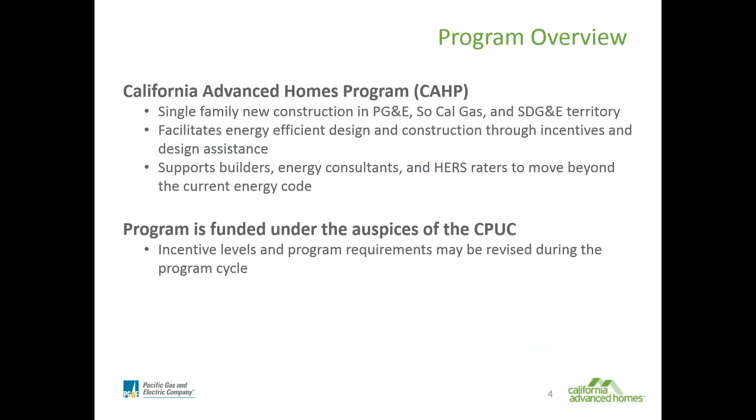We do that through trying to structure financial incentives, through design assistance, and a lot of different avenues. The program is funded under the auspice of the CPUC, and we welcome that.

The program is changing slightly, and that change will be announced in the next few weeks. We're looking at a slightly different program structure that will allow a more equitable entry across the state. More information will be coming on that, so stay tuned.

And the energy consultants listed on the projects must be a CEA under either the 2013 or the 2016 code. At some point, we'll drop the 2013, but we have it for now, just to make it easier.

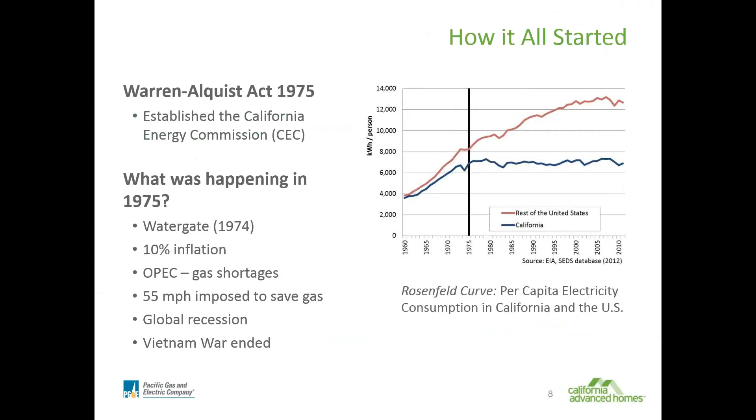So the code is kind of shifting from an energy efficiency code to a grid harmonization code. And there's another webinar on that in a couple of weeks about what that's going to look like, what grid harmonization really looks like in terms of the CEC.

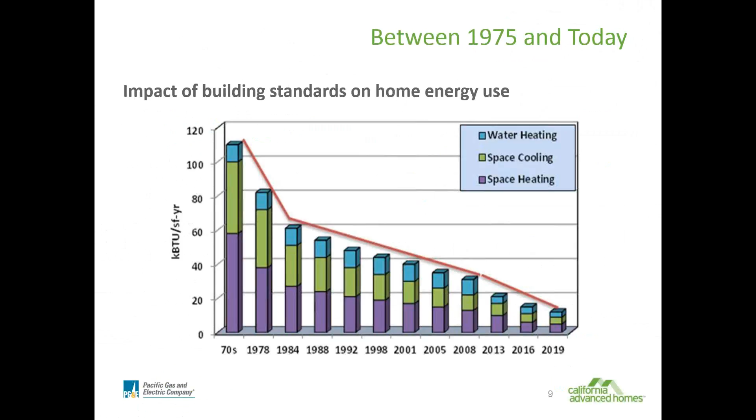TDV is also very important to understanding the code and how to make buildings more energy efficient. I'm not going to go into it deeply, but TDV, time-dependent valuation, is just giving a value for the amount of energy you used based on the time of day it's used. I'll show you a little graph about that.

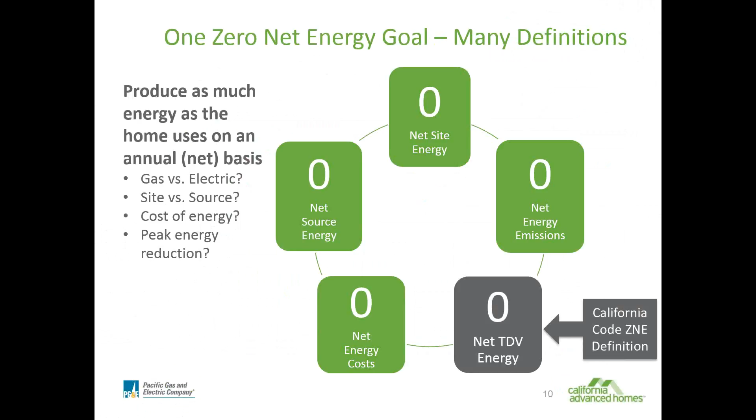This is an older slide. What used to be called TDVs is zero net TDV energy, time-dependent valuation. In the last two months, it seems the CEC has changed the definition of ZNE to be zero net electric consumption, site consumption. We'll talk about that in a couple of weeks. So the definition of ZNE is shifting, maybe dramatically, but it is changing. In the 2016 code, zero net TDV energy was the definition at the time.

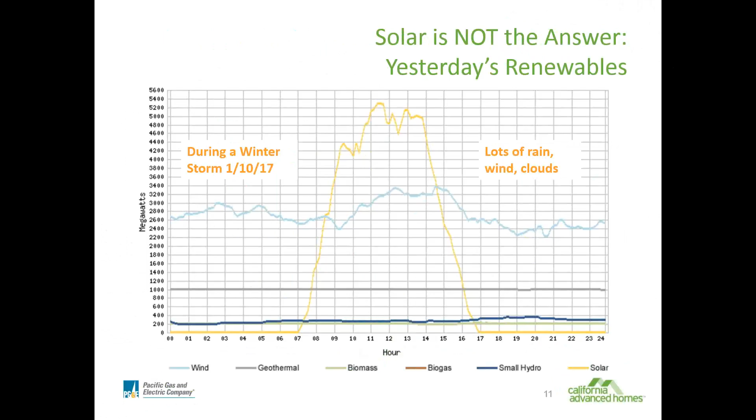This was a screenshot from something you can look at live every day, but this was taken a couple months ago during that last really severe winter storm, showing the levels. This was the next day, and as the storm was blowing by, you can see the wind being generated slowly decreasing.

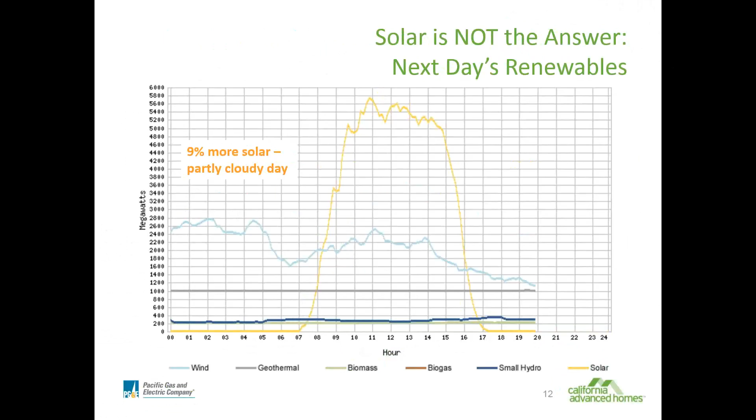Every day this graph looks a little different, but it's generally the same shape. Your peak is going to be higher in the summer, and even more dramatic.

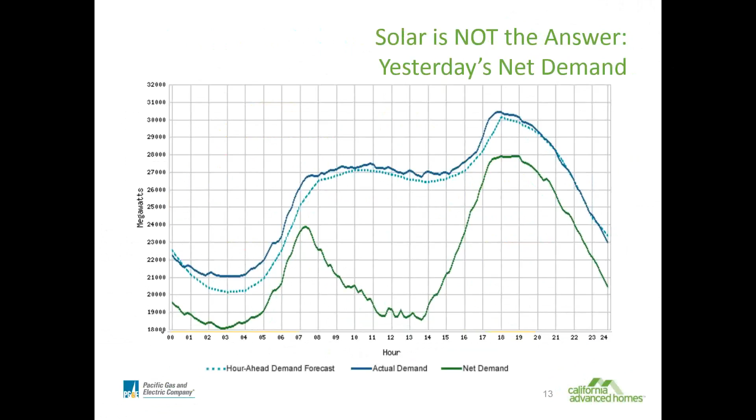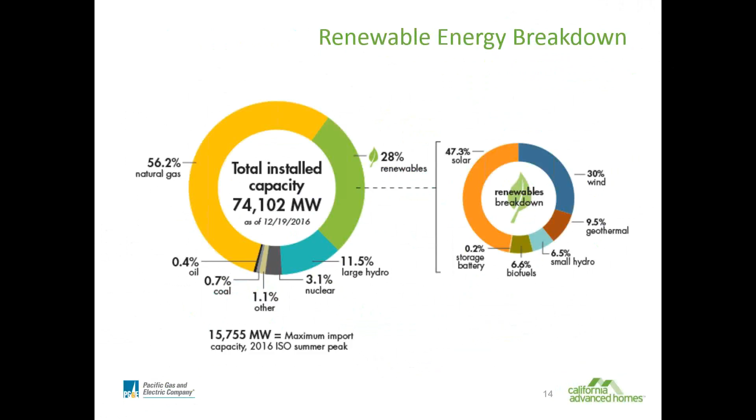Also understanding how to make buildings more energy efficient, it's super important to understand the climate zone you're working in. I've seen many times where people forget what climate zone they're in, or just don't understand the differences. As an energy consultant, that's our job, right? To really help people understand the differences from climate zone to climate zone.

I've seen it many times where somebody in climate zone 7, which is coastal San Diego, the contractor thought it was a great idea to put a cool roof on because cool roofs save energy, right? Well, cool roofs save cooling energy, and if you're in a climate zone that has heating energy and no cooling energy, putting a cool roof on actually increases the energy used in the building.

I've seen that a lot. I've seen climate zone 3 where people put in low solar heat gain coefficient windows because they couldn't wait on the energy consultant, and they just put in better windows. And what is a better window? Well, that all depends on the climate zone you're in. Climate zone 3 along the coast, you just got to be aware that solar heat gain through your windows can help reduce energy consumption.

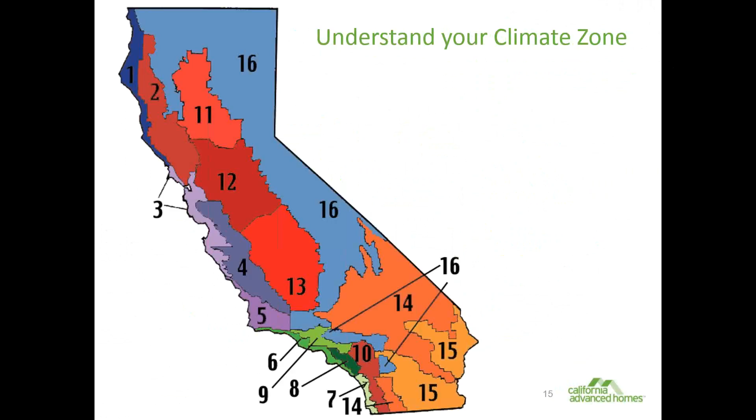It's not just plug loads, let's call it non-regulated loads, which can be lighting as well. So that non-regulated loads is a much larger piece of the puzzle of energy use in buildings and will be emphasized more in future codes.

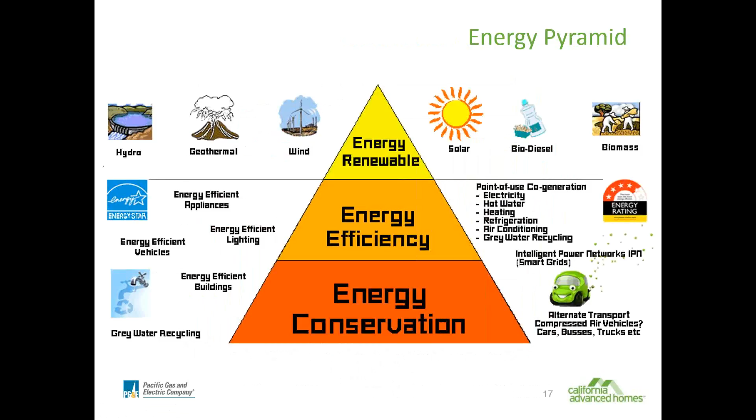This maybe doesn't apply to a presentation on the building codes, but I believe there's so much more energy to be saved in a building and how you operate it, and that's really the energy conservation piece. The energy efficiency piece really talks about the code, and then there's the renewable piece, but I won't go into that too much more.

So we'll pause again if there's any questions on that before we go. We did have a question from 2 slides ago, asking if the slide was referring to a gas hybrid house or an all-electric house set to TDV values with gas not available.

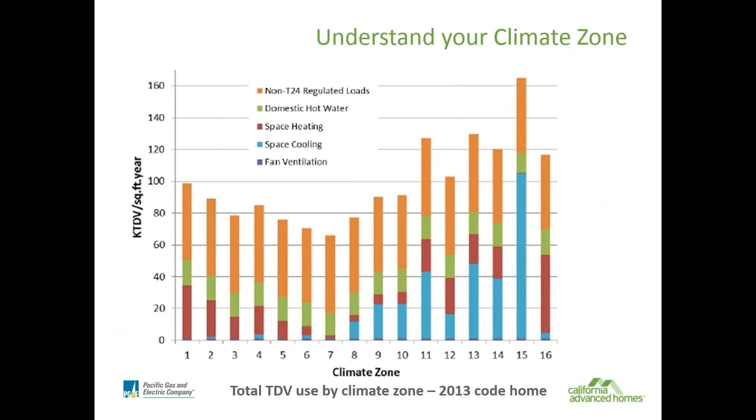This is set to gas heating, electric cooling. Yeah, so the gas-electric combo house. That's what you see typically across the state. All right, no other questions right now.

All right, so changes to the code.

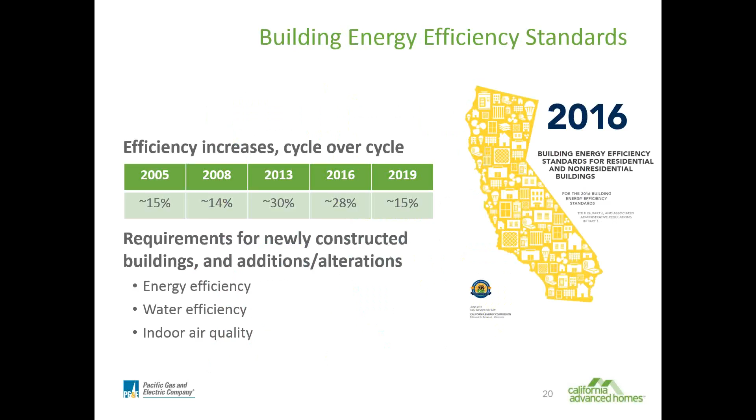So the standards are divided into 3 different parts. There's the mandatory requirements, which is the absolute bare minimum of what you can do. So an example would be like R13 in your walls - you can't do less than R13.

Then there's the prescriptive packages, which in previous cycles of the code have been all about how to build a building without running an energy model. That's not true anymore - building a building prescriptively is really not possible, although I'm sure somebody will tell me that it is. But in all practical reality, you have to do an energy model every time.

But what the prescriptive package does is set the standard home, or the baseline, or the energy budget. If you're building a home, the modeling software will build the same home or building at the same geographic location, the same orientation, and the same square footage - but building it with the prescriptive package involved. So that's really the majority of the changes in the code, all the prescriptive packages and what's changed.

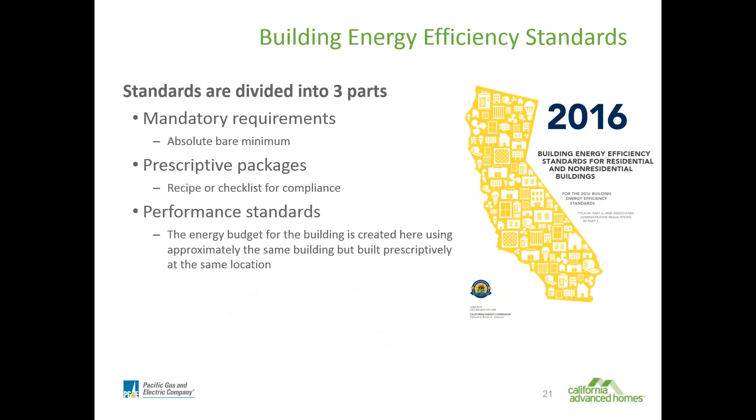And this is the government looking farther than we typically do - they're looking 30 years out over the life of this payback, whereas for a lot of building owners, they usually want a 2 to 3 year payback. So the code is looking much farther than that.

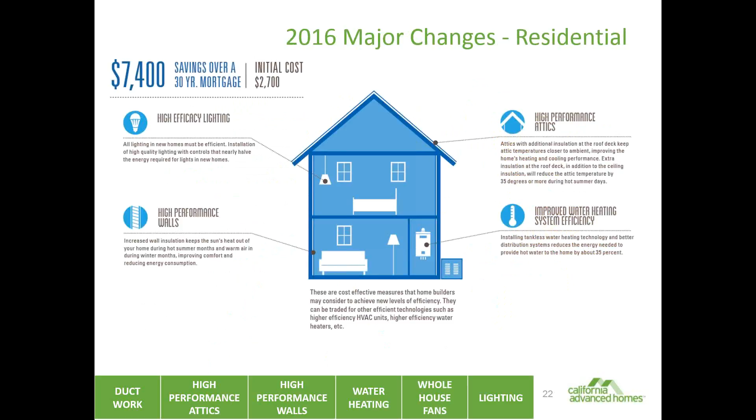And the leakage requirement has gone from less than 6% to less than 5%. In reality, this is a pretty minor change, although I'm sure there will be times when it causes heartache for people trying to get their ducts to pass. But 5% is quite doable. I know people who install ducts every day that can get much less leakage than this. When you look at it in terms of leakage and what that does to the house, there's a pretty direct correlation: if you're leaking 5%, that means 5% of the money you spend to heat and cool the house is leaking out before you get any of the benefit. So you're taking a 5% haircut right off the top at a 5% leakage rate. That's still a lot, I think, but a very manageable change.

So a lot of work went into the attics on this code change, and they're trying to fix the attic to help address the duct leakage issue. Why do we put ducts in the attic as an industry? It's the worst place to put them, the harshest environment in most climate zones of California. But it's simply easy and inexpensive to put them there. That's how a lot of our building customs have evolved - we do what's cheap and easy. Frankly, architects don't pay a lot of attention to how ducts are installed in general. They just assume the attic's a nice big wide open spot and figure out where the ducts go there, which means less design work for them inside the conditioned envelope.

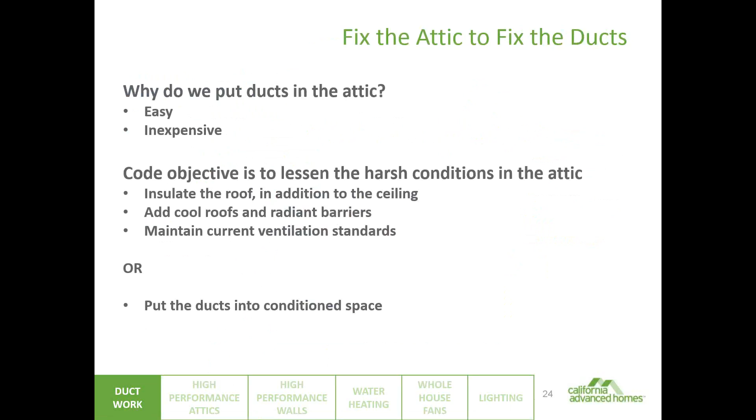So the changes - there are 3 prescriptive options in the attic: High Performance Attic A, B, and C. A and B involve insulating the roof deck. C is moving the ducts into conditioned space. Beyond those prescriptive options, there are a couple other ways to reduce duct loss that we'll address: sealing the attic and having no ducts.

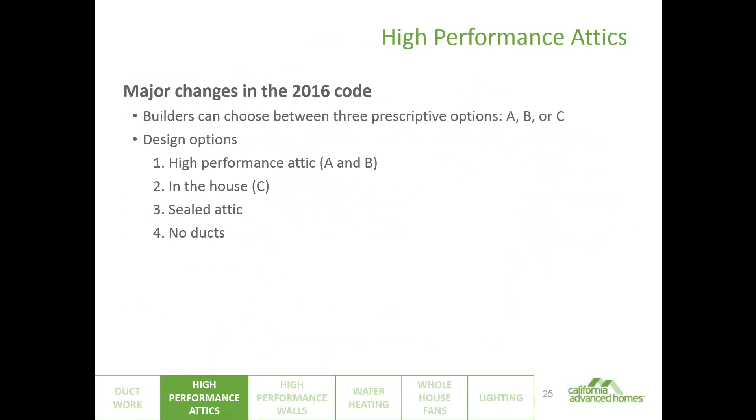So prescriptive option A: you will insulate the ceiling just like you normally would, whether it's R38 or R30. You would install continuous roof deck insulation - that's an R6 above the roof sheeting, or an R8 with no airspace. But R6 is usually going to have an airspace, so you'll have an R6 with an airspace above the roof deck. This method is challenging for most builders I've talked to. How do you do an R6 above the roof deck? It's going to be some sort of rigid foam above the roof deck.

The challenge is how do you get that to work? If you've got a regular comp roof, you're still going to have to have something to nail to. So above your OSB, you'll have your rigid insulation, and then you'll need some sort of OSB again to nail to. It's quite a challenge - you could do that altogether as a SIP, which is again quite a challenge to our industry. If you're doing concrete tiles, like barrel tile, you can do a slip-in piece of foam underneath them. There's a product called Wedge-It that seems to address this issue fairly effectively. But with this option, you're also installing the radiant barrier per your climate zone.

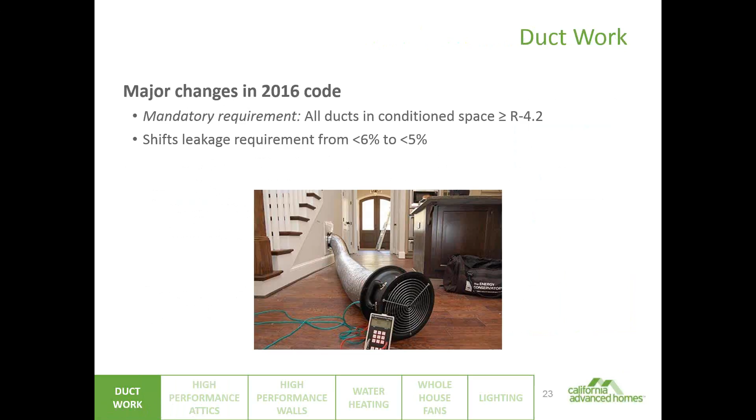I guess the question isn't quite clear to me. The insulation on the ducts hasn't changed, other than the ducts in conditioned space. Certainly more insulation on the ducts is better, but it doesn't change the prescriptive option A or B.

We have a couple of comments, but I think you'll address them later, and if not, we can follow up individually. Okay, sounds good.

All right, option B—this is high performance attic option B. This is essentially the same as what I just showed in the previous slide, except instead of the insulation being above the roof deck, it's below the roof deck.

So now, still at the ceiling level, you've got your R30 or R38 based on your climate zone. And at the blue, at the roof sheeting, you're going to insulate underneath the roof deck to an R13, or R18 with no airspace, but most of the time it'll be an R13 with the airspace. Still, you're venting the attic just like normal. A radiant barrier would not work here typically because you need an airspace next to the radiant barrier. So very much the same as option A.

I see option B as an easier path for most builders because it really requires very little change, other than somebody going up and doing R13 underneath the roof deck. Not a fun job at all, but it can be done without changing anything in the building process. The home can pretty much be done and send somebody up with a roll of R13 and a staple gun—a totally lousy job, but it can be done that way with very little change to the process of building.

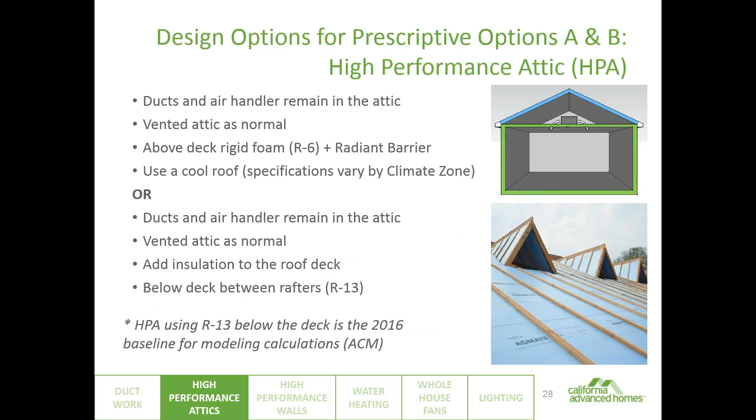I have a question that came in, Scott, from the last slide. Do these R-values include thermal bridging with the framing members, or is it just the insulation level of the batt insulation? Great question. Yeah, that's just the insulation level of the batt insulation. It doesn't include the whole roof assembly. It's interesting that this is the way it's displayed, but yes, this is just the insulation of the batt insulation. Okay, thanks.

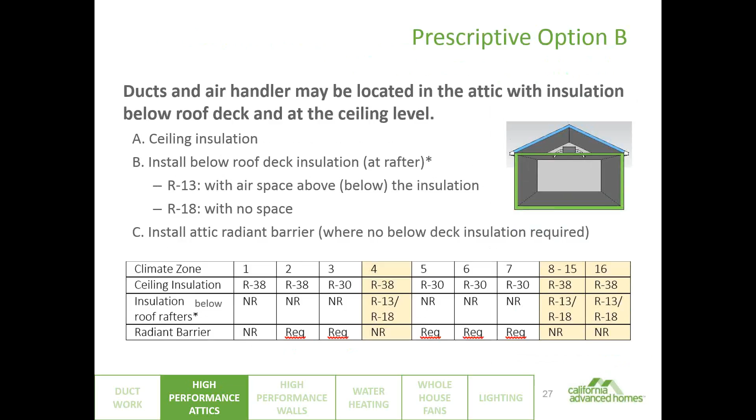The best way to go about it is the way most multifamily is done, and that's to move the ducts and the air handler into the conditioned space. This way you won't be losing extra energy through the ducts or any of the equipment, because now it's inside the conditioned space. By far and away, this is the best way if you're going to use a ducted system. And if you do that, you don't need insulation in the attic, except at the ceiling level, and that's prescriptive.

You're going to have your radiant barrier installed in all the climate zones except climate zone 1, which is the very north coast of California. So there are a lot of different design options for this, but somehow it's got to be dropped into the living space, and I'll show you a few.

Just to note, cathedral ceilings and sealed or unventilated attics do not qualify under this path, and there's a big issue in the energy consulting industry about why an unventilated attic isn't treated the same or better than being in conditioned space. Part of the reason you do get savings from it, but part of the reason for the difference is that you can't then have a whole house fan work as well. That's part of the loss. We'll talk about it more later. But yeah, putting the ducts in the house...

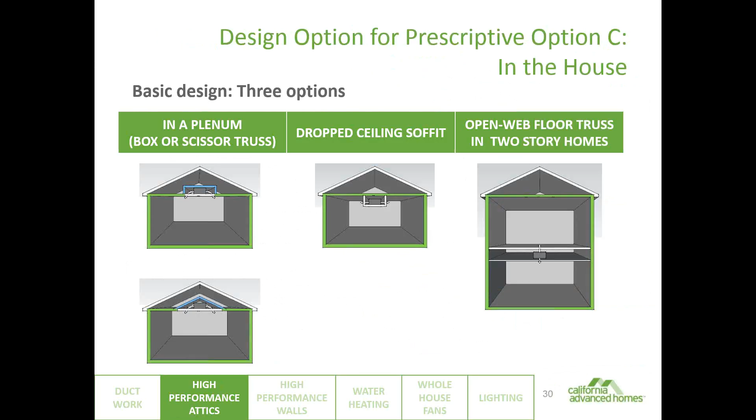Scott, a question about insulation. How does the insulation below the roof deck affect venting the attic? Okay, so the insulation below or above the roof deck should not change how you vent the attic. Obviously you wouldn't insulate over the vents, but it doesn't change the venting requirements. Your O'Hagin vents, your eyebrow vents, would all be done just as you normally would, but you're just going to insulate where there's not a vent area. So no change to the venting. Okay, thanks. You're welcome.

The sealed attic is a popular choice, especially among building scientists and building science-minded folks, to insulate the attic. That means moving the thermal barrier and air barrier all the way up to the roof line. At the ceiling level there's no need for any insulation at all, but your thermal barrier and air barrier are moved up to the roof deck. The nice advantage is that your equipment is now in a kind of unvented attic. The CEC doesn't call it conditioned space, but for most intents and purposes it's a lot like conditioned space. You do get really good energy savings out of it, but it's not the same as being in conditioned space. The insulation you're putting in the roof deck would still be per climate zone, minimum R30 or R38.

The below roof deck rafters R13 should be taken out of there - sorry about that, that's an error. But it's just about sealing that space. So with this option, you're no longer venting that space. One of the main downsides is that whole house fans don't work at that point, or current designs of whole house fans don't work very well. And if you're going to insulate the attic, there are lots of different ways to do it. The fastest and easiest way to create a thermal barrier and an air barrier is just using spray foam below the roof deck.

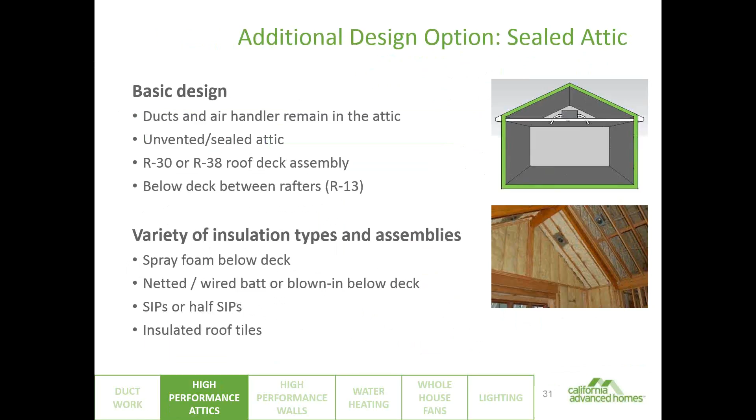Some of this is spurring some innovation, and this is a product by Owens Corning. It's called box netting, where this is stapled to the roof rafter. It's like this picture here where it's stapled, and the box part of it, there's like a little sewn seam or tape seam here that tries to hang it like a box underneath. What you're getting is this insulation area between the 2x4 and down, and that gives you the thermal break. So this is one way to really get your 30 or 38 or even more insulation at the roof deck and stopping the thermal break.

You could also do this if you want to ventilate the attic, but I haven't seen it that way. It's a lot of work if you're going to do it that way.

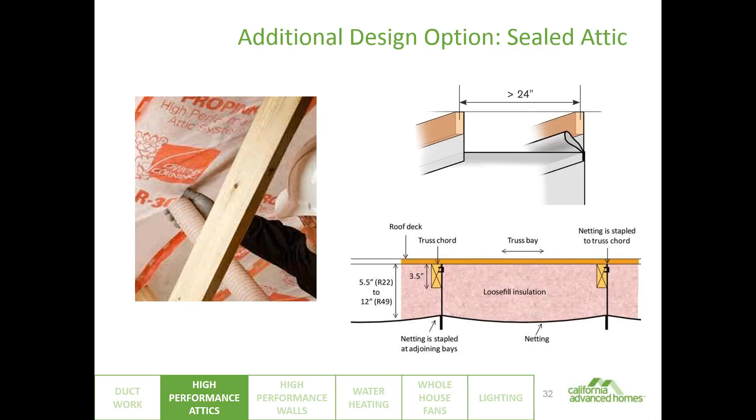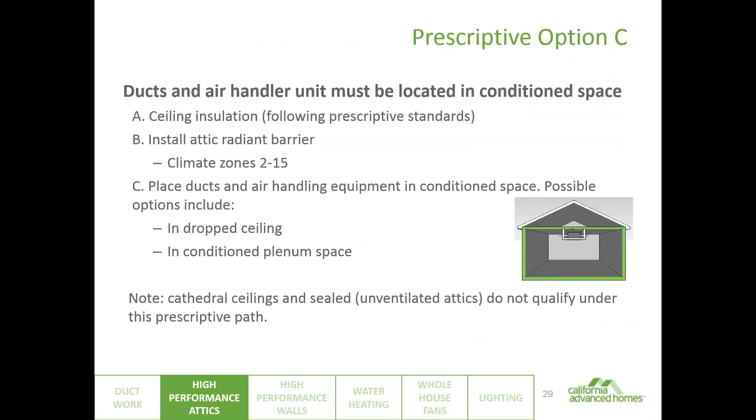Someone brought up the QAI requirements. I know we didn't plan on addressing HERS tests in this presentation. Would you be able to give a quick summary on the changes to QAI in the 2016 code, or do you want to follow up on that privately? Let me follow up on that. Okay, no problem.

The other option, and this isn't really in the code, is just no ducts or even just doing fewer ducts. Mini splits, hydronic PTACs are all ways of getting rid of ducts and therefore the duct loss. There's advantages and disadvantages to all of those. Mainly with mini splits is that they're derated by the software because they're derated by the Energy Commission. But I think at the very least it brings up the conversation, or should bring up the conversation, about why do we have so many ducts in our house.

Now that our envelopes are becoming so good, do we really need a duct going to a bathroom that's 50 square feet or 60 square feet? Do we need a duct going to every single room, or can we move air through our ventilation system that's going to even out the temperatures? Because every duct you can get out of, or not put in the house, means there's less duct loss conductively through the duct itself. There's less air leakage possibilities, and there's less resistance on the fan.

So I'm a little amazed sometimes. My laundry room doesn't need to be the perfect temperature when I walk in and out of it. If there's no duct there and it's 3 degrees different than the rest of the house, that's okay, but it would mean much more long-term energy use and energy savings by getting rid of a few ducts in the house. Some simple, easy places to do it.

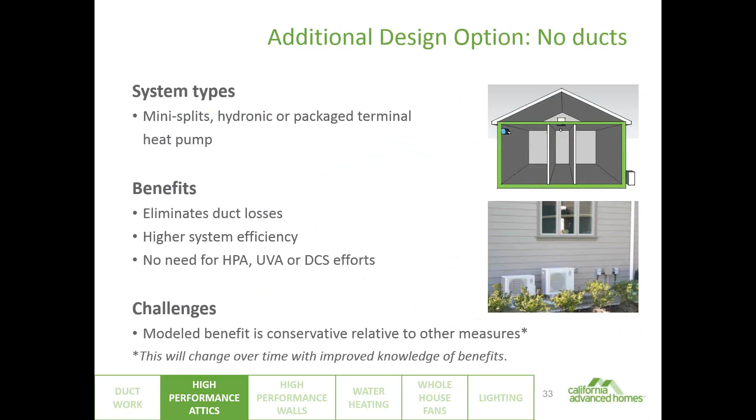Right now, in all but climate zone 6 and 7, the U factor went to 0.051, which is an R19.6, so close to an R20. And that is the assembly R value. It's not the insulation in the cavity. So that's the assembly R value. Climate zone 6 and 7 didn't change from the 2013 standards.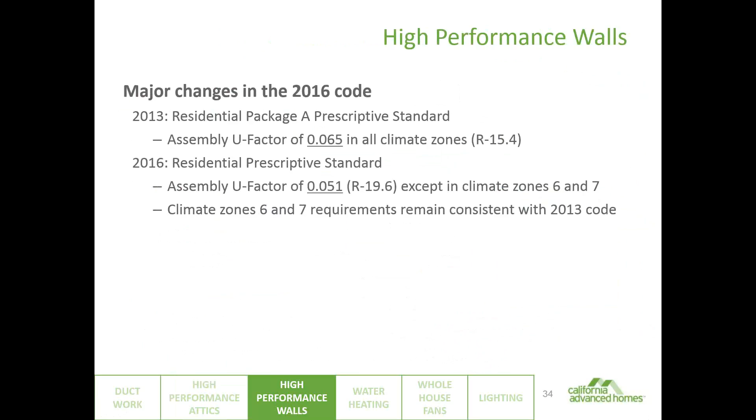This is another area that is increasing, becoming more stringent for the 2016 code, or it's looking to be getting going there anyway. This is also one that I've heard pushback or concern from builders about, because getting R value in a wall, really the only way to do it is to make it thicker.

And that affects a lot of their construction practices and setbacks. So if you're going to build a 0.051 wall, here's a bunch of different ways of doing it. The U factor depends on your framing size, stud spacing, insulation in the cavity, exterior insulation, and the type of insulation you're adding. But what you'll see in all of these is that they all have continuous exterior insulation.

In some parts of the state, this is not unusual or new. In other parts, and for some builders, adding continuous exterior insulation is a big deal, especially for those builders who are really clinging onto wanting to build with 2x4s. If you're building with a 2x4, now you have to have an R8 on the exterior of the building, which is going to be 2 inches of rigid insulation hanging off of the wall assembly. That's a lot.

Again, I want to stress that this requirement is a prescriptive requirement, so it's not mandatory. You don't have to build an R19.6 wall, but this is what your building will be judged against. So if you choose to skimp and have a smaller wall, you've got to make up for it somewhere else in the building. And the code is really running out of room to where else we can make this up.

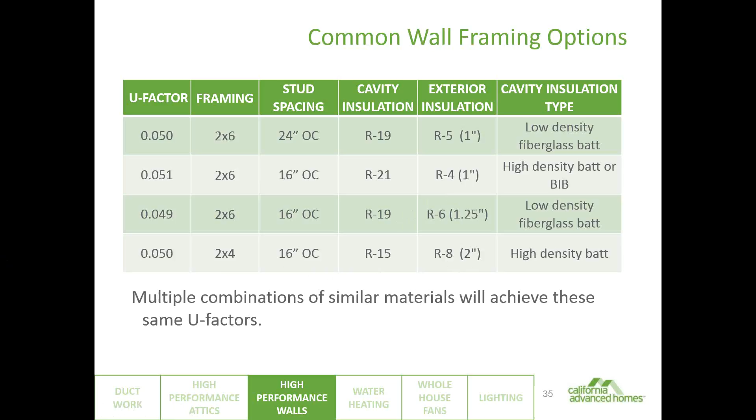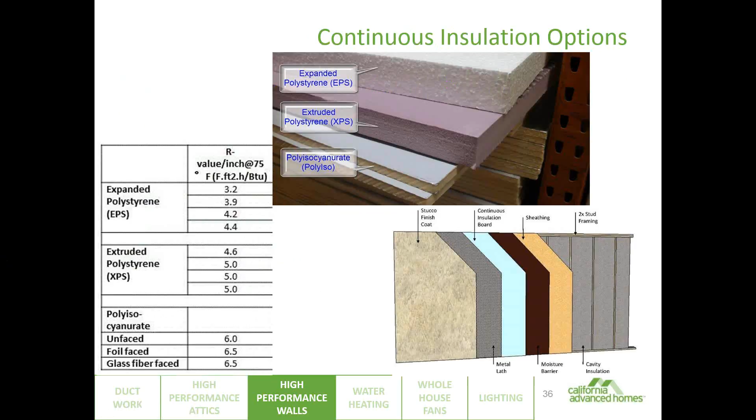So that continuous exterior insulation can be done in a few different ways. There are 3 main types: expanded polystyrene, extruded polystyrene, and polyisocyanurate. They each have different R values per inch, and price pretty much goes up as you go down the list. So you can have less thickness on the exterior wall by paying more money, but you can't get away from it.

This table just shows, this is from the reference appendix. I bring it to your attention because the reference appendix is part of the code, part of some of the code books, and it gives you lots of different options for building a .051 or better wall. Everything to the right of this yellow dot is better and can be built.

This table shows 16 on center, and everything from this line down is 24 on center, framing type, and then added exterior insulation. So really what this is showing is that, at least on this one page, if you're doing wood framing, you cannot get away from doing something on the exterior with continuous insulation. The best you can do is an R2, which would be a 1/2 inch, if you're building your walls with 2x8s, which is pretty rare.

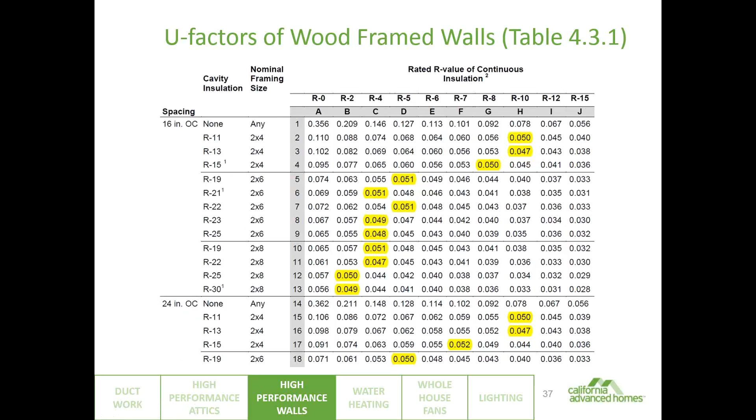There are, of course, other ways to build walls. You can do a double wall here on the left, or a staggered stud wall. Both of those are options. That essentially moves that continuous exterior insulation into the middle of the wall. It's giving you the thermal break that exterior insulation does, but in a different manner.

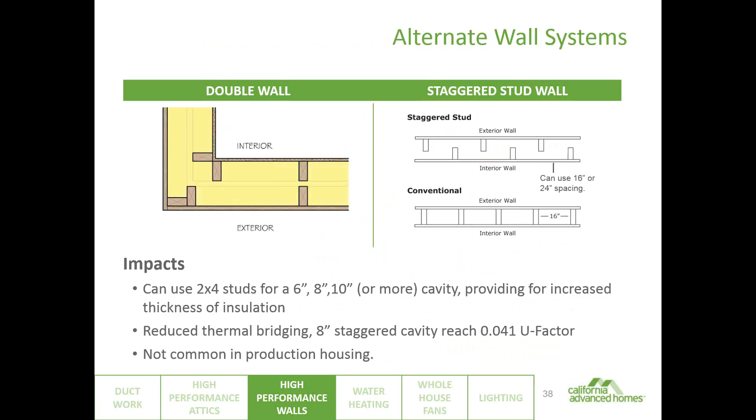Probably not very practical for most homes. We see these in multifamily a little more, but probably won't see them often in the field. We can also throw away the studs altogether and do a different type of wall assembly. Again, probably won't be very popular. I've built with SIPs, and that's a way to do it. Your walls are still going to be thicker than what we're used to, but maybe it's time to rethink how we build walls, whether doing a SIP, structural insulated panel, or an insulated concrete form, or maybe there's something else.

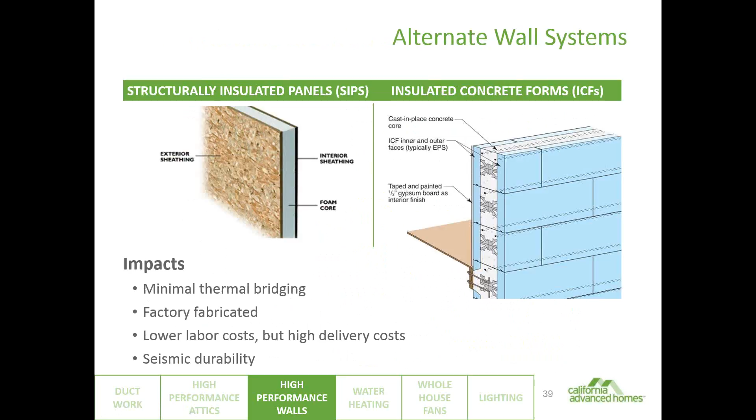So I say all this about walls and attics, and it's with a heavy heart that for full disclosure, I have to tell you that for 2016 code, you don't have to do walls or attics. You could just throw some PV on it, and you get energy conservation credit by putting an energy generator on your roof. It totally goes against my grain, what I've worked for forever, but this was let into the code.

Basically, as I understand it, the concern of the builders was that we can't build those types of walls and attics. It's too disruptive, it's too expensive, we don't have people that know how to do them. That was the concern, so this was put into the code that says if you don't want to do walls and attics, you can put a PV system on your roof instead.

At least 2 or more kilowatts DC for a single family home, 1 for multifamily. As long as you put 2 or more kilowatts DC on your roof, you will get the same energy conservation credit as if you did walls and attics. So you could do walls and attics and a panel, and you could double dip on that energy conservation credit. But this is an option for 2016.

As I understand it, the CEC is saying this is coming out in 2019. This will go away, so they're giving the industry 3 years to figure out how to build walls and attics, giving them this easy out. I would say with the easy out, it will make them not learn walls and attics. But for right now, in 2019 this PV compliance credit is gone. Of course, part of the industry is fighting to keep it in, and part is fighting to take it out, but it's there right now.

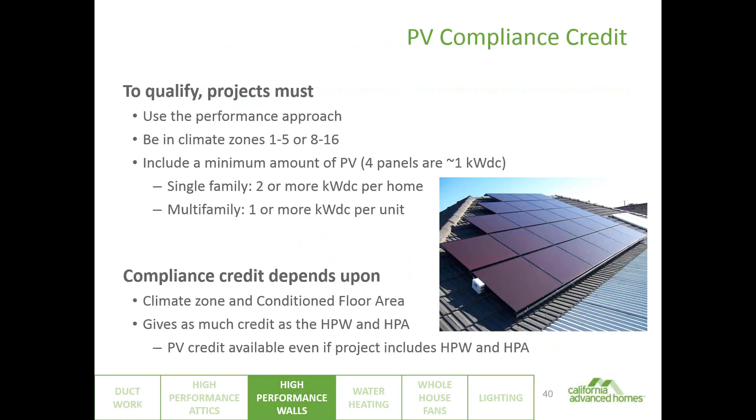So moving on to water heating. In water heating, basically the standard design water heater changed from a 0.6 energy factor tank water heater to a 0.82 energy factor tankless water heater.

This is one of those where I think in the 2013 code especially, a lot of builders were taking compliance credit off of this one, and they still will, right? There's some federal preemption going on here, and it's an easy one to be more efficient than the 0.82.

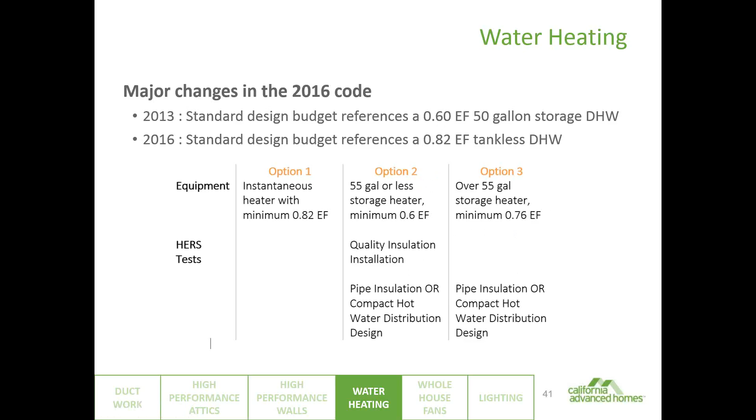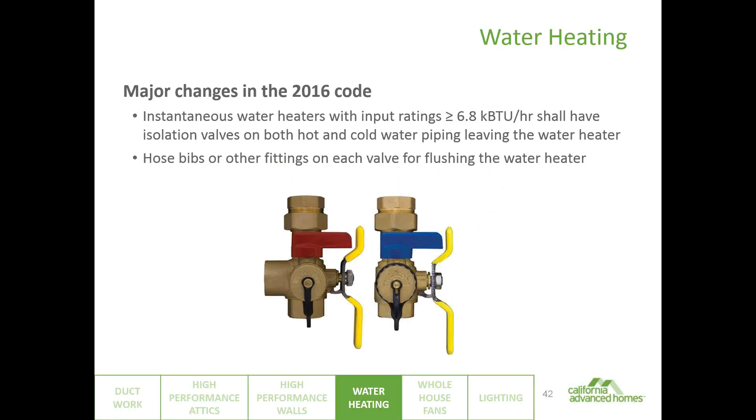Also new is that isolation valves are required on both the hot and cold for on-demand water heaters, or instantaneous water heaters. That's just so that they can be cleaned out.

Now just a note, this is not ventilation, this is cooling. Whole house fans are about cooling the house or building, not about providing fresh, clean air to the occupants. A whole building ventilation system is a different system than a whole house fan.

These whole house fans are probably the best way to save energy in the Central Valley. I would say anywhere from Fresno up through Redding, but the sweet spot is certainly climate zone 12, right around Sacramento. Whole house fans can save an enormous amount of energy, because what you're doing is turning off the compressor in your air conditioning, and that's what uses all the energy. The whole house fan is a great energy saver.

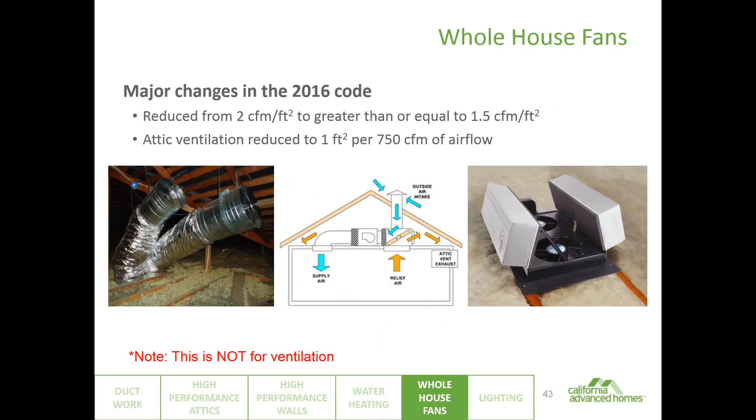It's not so challenging in residential, but in commercial it's very challenging. So the Lighting Technology Center is a great resource, just as Energy Code ACE is for the rest of it, and maybe lighting too. But the Energy Code ACE I go to for other reasons, almost everything but lighting. Anyway, that's my spiel on them.

Major changes to the lighting code: now all lighting changes are mandatory. Lighting is not part of the energy budget, so there's no trade-offs. You can't say, well, I want to put incandescents in, but I'm going to build better walls - that doesn't happen. These are all requirements. Some of those requirements are they have to be high efficacy.

What they've also done is relaxed the requirement on luminaires, the fixture type, with more focus on the lamp. What that means is we can now screw in light bulbs once again according to the energy code. And a whole bunch of 'how many does it take to screw in a light bulb' jokes are now viable, and future generations can enjoy them as well.

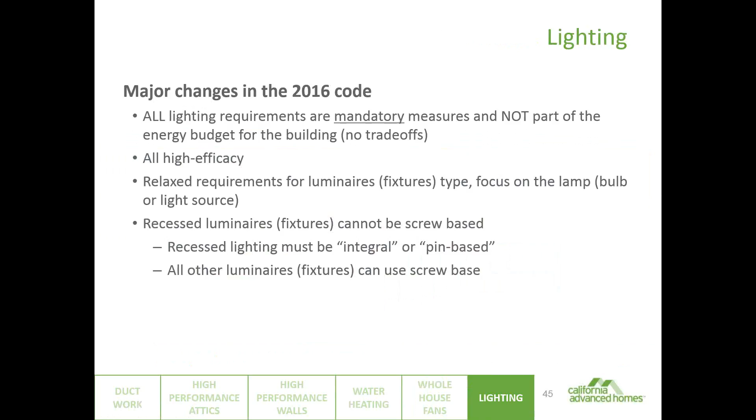Screw-in light bulbs are okay everywhere in this code except in can lights and ceiling recessed can light fixtures. For can lights, they have to be either pin-based or integral—really it's going to be an integral LED system, which I've got a picture coming up to show you. It's just where the whole fixture itself is one kind of sealed device that has an LED in it. But everything else can be screw-based, with a few limitations.

Sources that qualify as high efficacy: linear fluorescent lights, pin-based CFLs, high-pressure sodium, metal halide, and induction. Other lighting, basically meaning LED lighting, is allowed as long as it meets the JA8 requirements. That's Joint Appendix 8.

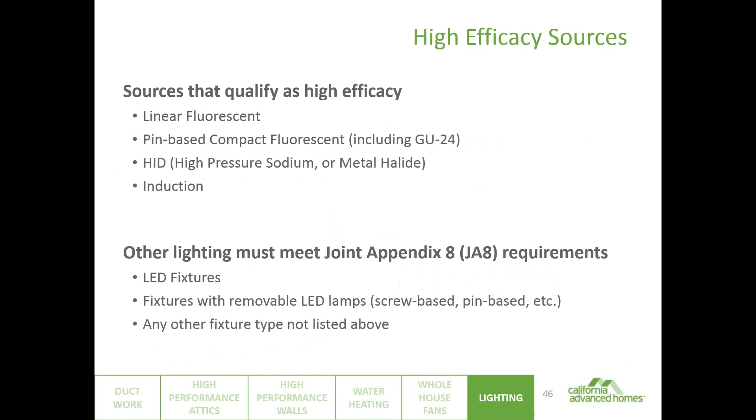JA8 are the requirements, and here's just a few of them so you get a taste. These JA8 requirements were put in due to the fact that when CFLs came to market—what was that, 10 years ago or something—there was kind of a quality issue on some of the early CFLs, and a lot of takeback in the market, so CFLs didn't gain adoption as quickly as they'd like. These requirements are an attempt to make sure the quality of LED bulbs is high enough that they last long enough that people will buy and use them.

There's an efficacy requirement here: color rendering index, color temperature, dimming. The two probably most important—and it's fairly challenging to go buy a light bulb these days because there are so many options—are the color rendering index of at least 90 out of 100, and the color temperature.

Just real quick: there are two main color temperatures of LEDs, 2700 Kelvin and 3000 Kelvin. 3000 is a brighter light, and brighter light is not always what you want. The 2700 is a warmer, more calming light—you want that in rooms where you're relaxing, like your living room or bedroom. 3000 is brighter and makes you more alert—you want that in rooms like your kitchen or office, where you want to be on, not relaxing. So just buy them accordingly. Having the right bulb in the right location in the house is really important for overall satisfaction with LED bulbs.

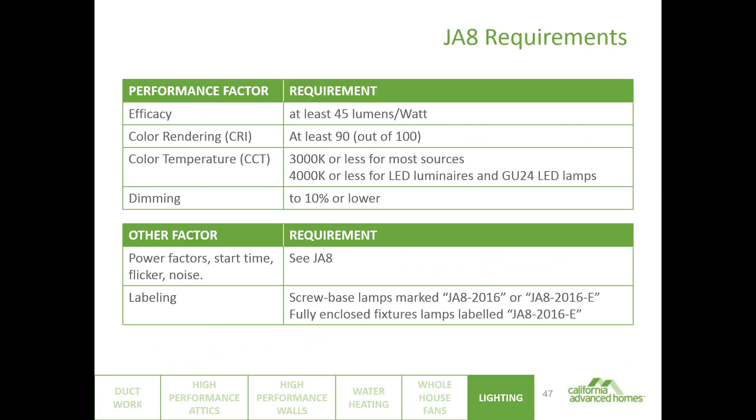So your downlighting requirements, like I said, still have to be high efficacy. They cannot be screw-based sockets. They do have to be JA compliant. These pictures on the right are all integral LED downlights.

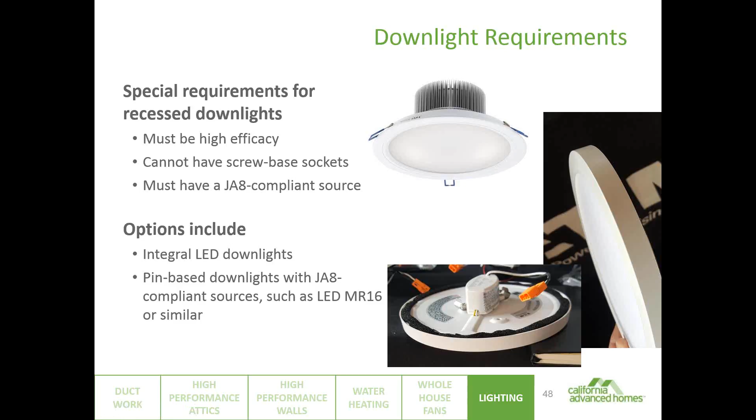The one on the bottom far right, I took a picture of those at ResNet last week. That's essentially an LED can light, but LEDs are such now that you no longer need a can. That little knob that sticks up on the back—these are the same light—would just fit up into the J-box and make this whole fixture look like a can light, but not be a can light. The thickness here is about half an inch. So can lights are certainly changing, both the technology and the code.

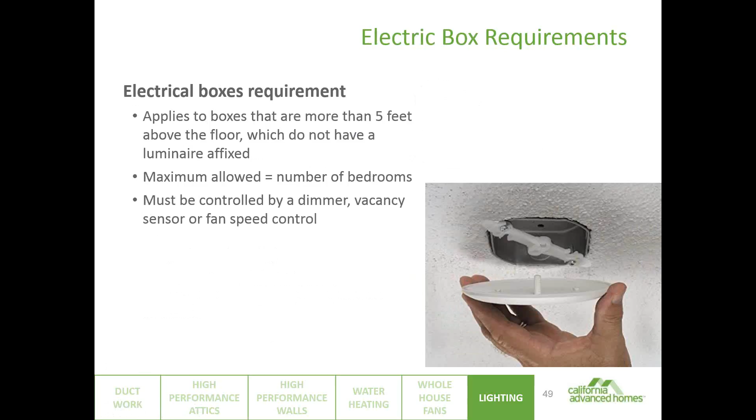And then the electrical box requirements. For new construction residential, a lot of times there'll be blank electrical boxes left in the ceiling, so that when the homeowner moves in, they can buy a ceiling fan and put it in themselves. The code made it so that you can only have the equivalent number of blank electrical boxes as you have bedrooms in the house. Doesn't mean they have to be in the bedroom, but you can only have the same number of blank J boxes in the ceiling or above 5 feet from the floor. Usually that's going to be the ceiling, right? And those blank J boxes have to be controlled by either a dimmer, a vacancy sensor, or a fan speed control, so they understand what will be going in there.

Seems like there was something else I wanted to say there, but I can't think of it. All right, we'll go on.

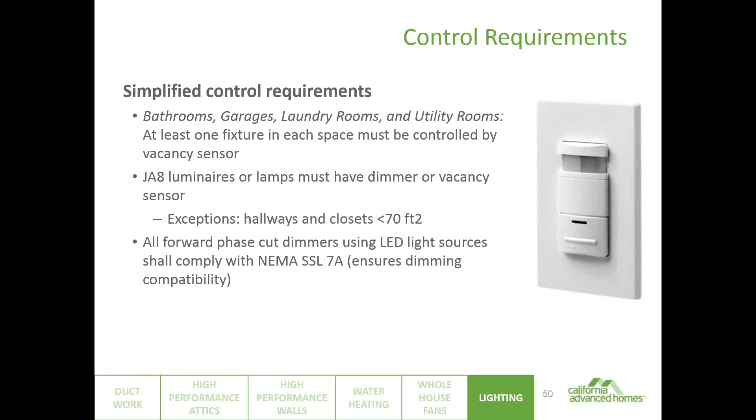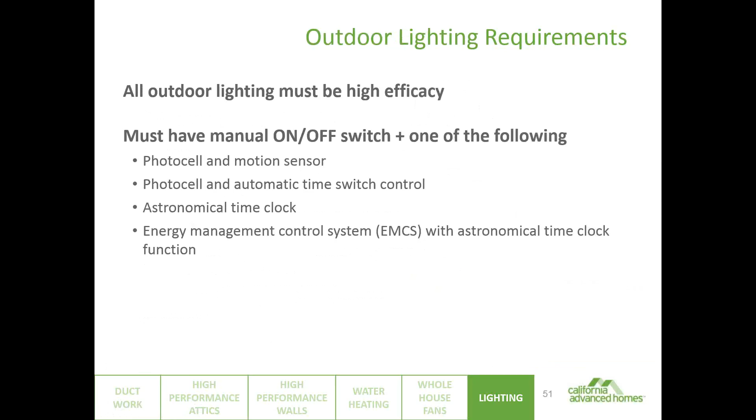And that's it. If there's any questions, we can answer that now. Hopefully there's a question or two. We do have one, and while everyone else is asking theirs, we can go over this one.

Do the lighting requirements apply to retrofit and remodels as well? It's yes and no. Certainly yes, in terms of all bulbs, all lamps are going to have to be high efficacy. Typically yes, they do, because they don't require complex control changes, and they are going to be triggered. But I would certainly consult with the building department that you're working in and verify how they want to verify compliance on additions and alterations.

Is there a threshold of project cost or similar that triggers the changes? No, not that I know of.

We had a question about the code being effective in multifamily as well. I believe that's a yes, right? Yes, yeah. Multifamily changed the same date, and so did commercial. Multifamily is a little bit different—high performance attics A and B are typically not an option. The prescriptive assumption in multifamily is that the ducts are already in conditioned space. The wall requirements are the same as what we've shown here, where they've gone up in thickness and R value, and again those are going up again in 2019 as well, walls and attics. But multifamily followed in line with what I explained here today for single family.